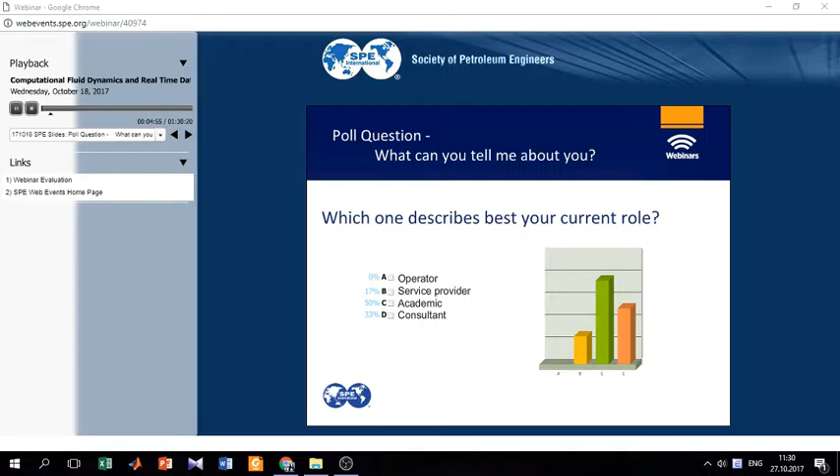Moving on, another question for you. Which one describes best your current role? So again, if you could select from the options available. This takes a bit of time to update with every answer. So we see some academic participants, consultants second, and service providers third. So funny enough, no operators on the line, or operators didn't bother to click on option A. We'll find that out during the call, I hope.

And then last question for you. What type of modeling tools do you use the most? Software from service companies, FEA and or CFD? You develop your own algorithms and models, or none of the above? Okay, so far a good distribution here. I encourage you to answer those questions. This is a way of me knowing that someone is out there as well. I hope this is representative. So a big participation here on software from other companies, and then a split between CFD, FEA, and own models developed. Thank you for that. That gives me a bit of a background to who I am addressing today.

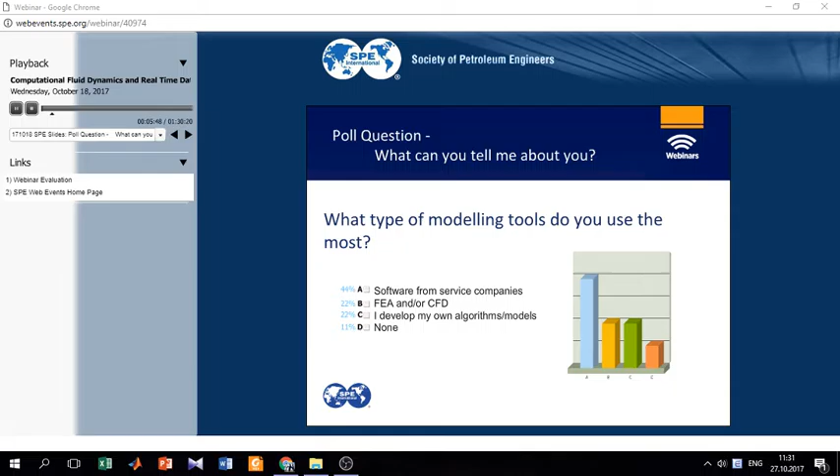So the webinar will be split in three main parts. But before that, I will just cover some introduction on the challenges that we face on a day-to-day basis.

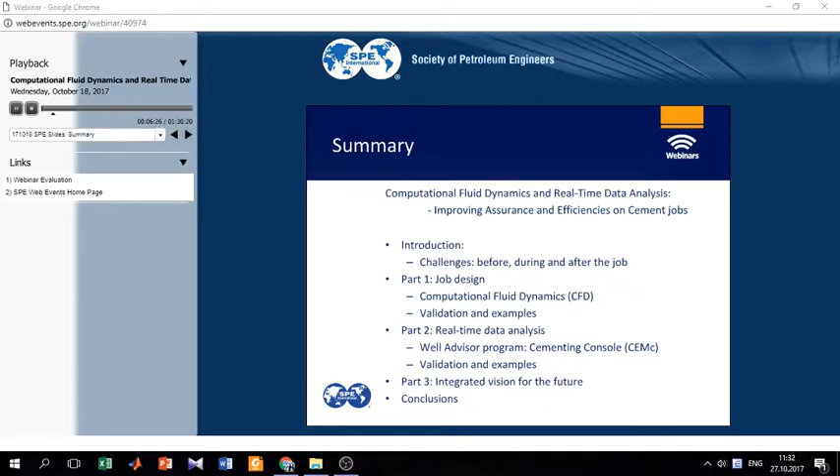And then, as I was saying, there will be 3 parts to this webinar. On the first part, we will be talking mainly on job design and how computational fluid dynamics can help us on that part of the work. On the second part of the call, we will be focusing on real-time data analysis. And then on the third part, I would like to share my vision for the future. I would like to share some ideas and concepts on how these two connect, the real-time data analysis and the preparation for the job.

So let's start the presentation by introducing some of the challenges here. And I would say that the main challenge in drilling nowadays could be perhaps split in 2 big groups. Some of them are physical challenges, some of them are in the domain of the digital and data. So, for example, in the physical aspect of it, drilling is still something that is hardware-based, something that is hands-on, and therefore we rely on challenges such as the pore pressure fracture gradient of the rock to drill ahead. We need equipment that delivers that drilling, and we need equipment as well to produce the wells later on.

In terms of data, we often work in a world that we do not have measurements every time we want some. So if you are drilling, you have to appreciate that the pore pressure fracture gradient often is given by models from the geologist team and subsurface teams as well. And based on that, we design the entire drilling setup and the type of drills, the type of casing used, and then the cement as well to provide reliability throughout the life of the wellbore. And whenever data is missing, we have to rely on simulation tools.

And what I will try to prove today here on the first part of the talk is that some of the simulation tools available in the oil field lack accuracy or even precision. So we might need to think a little bit out of the box in order to get that extra level of detail. If we're talking real-time data analysis, data needs to be available. Data needs to be transferred from the rigs to the office in central locations and perhaps be stored, be interpreted. So we need data management, we need data quality. Then we need tools that can process that data in real time or in almost real time.

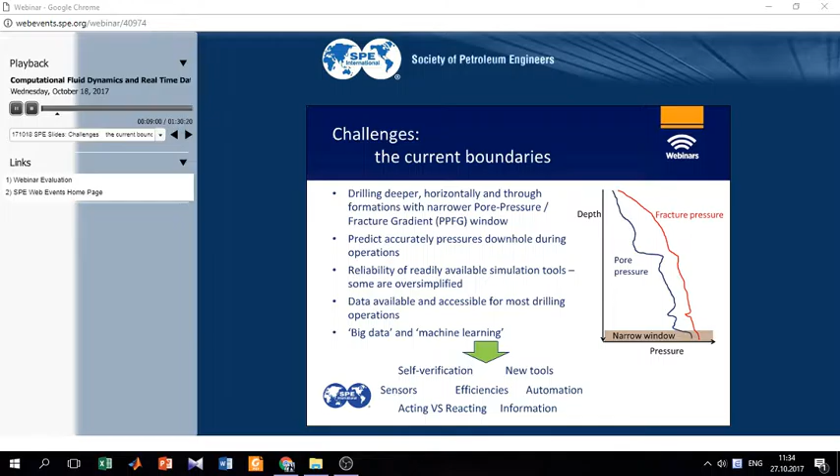So let's dwell a little bit more, as I was saying, in the job design. I will be showing 2 examples here using CFD tools. And in the first, I think it will be clear that some of the tools available do indeed not predict results very accurately, and how can we mitigate that? In the second example, I'll give you a very practical case where CFD helps make some informed decisions. But let's start with this first example.

On the first example, I'll be talking about the flow around liner hangers. This is a work that I did a few years back, and some detail of this work was presented at an SPE conference a few years ago. For those who do not know what the liner hanger is, it's basically a piece of equipment that has the objective of saving the amount of casing that you deploy in the hole. So it's a tubular structure that deploys the casing below it by latching itself to the previous casing, as shown here on the schematics.

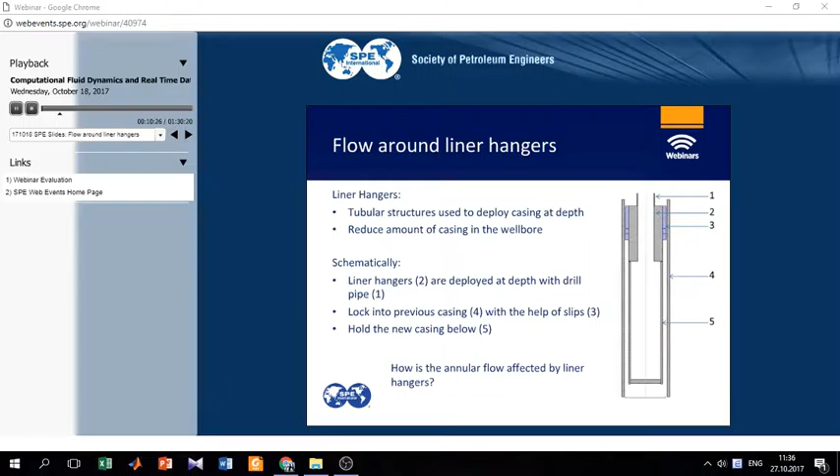But then, because of this latching, this metal-to-metal connection, we are creating restrictions to the flow. And those restrictions will affect the flow and will affect the pressure drop as we displace cement or mud past it. But to what extent? That's the question that we will try to answer. Many of the tools that are available nowadays in the oil field world assume two things. They assume fully developed flow, and they use simplified eccentric tubulars to mimic the complexity of these geometries, the geometric aspects of this liner hanger.

And those assumptions are not verified for flow around this equipment, as with any other equipment that has a geometry that detaches itself from a simple tubular. In this work in particular, I will be focusing on a liner hanger that deploys a 7 5/8 inch liner on a 9 7/8 inch casing, so typical dimensions. And I will be comparing some experimental data, a simplified concentric pipe model, an eccentric pipe model, which is an example of typical tools available in the market for the oil field, and computational fluid dynamics.

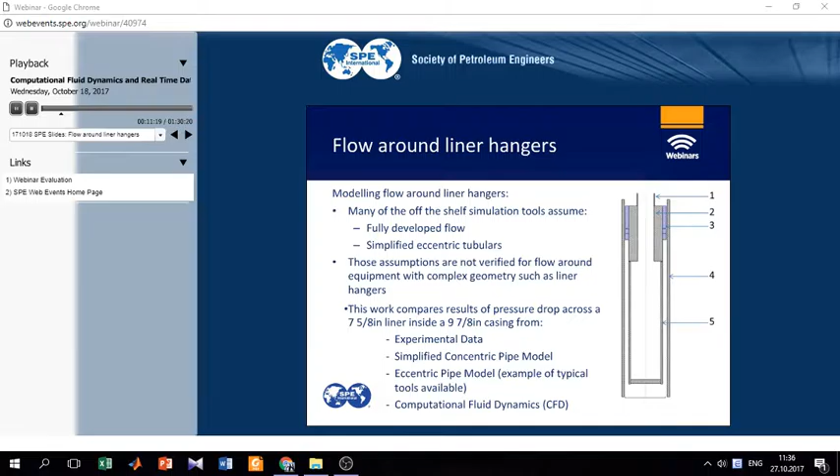Oops, clicking there on the wrong button.

So in terms of experimental test, this was done in a yard facility from a service provider. Service providers were also involved, and basically we have a hole that was 200 feet deep. We deploy the casing with the dimensions that I just said. We deploy the liner hanger, and then we just basically let mud flow around it or past it with those properties there. The mud would follow a typical Herschel-Bulkley model. It was a water-based mud with a constant density of 13.3 ppg.

And we were collecting pressure drop, or let me rephrase that. We were collecting pressure values at the pump at the surface for different values of flow rates. This was the experimental, and as you might appreciate, this will be used as a reference point. So any other result that I'll be discussing here, we would like them to be comparable to this experimental data.

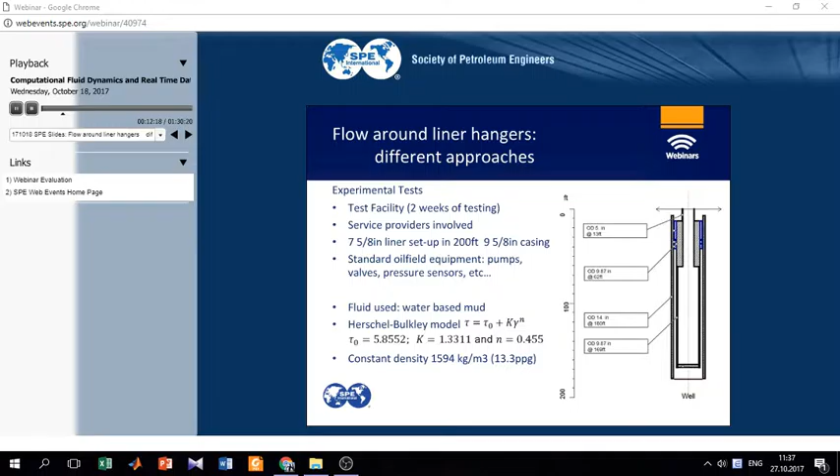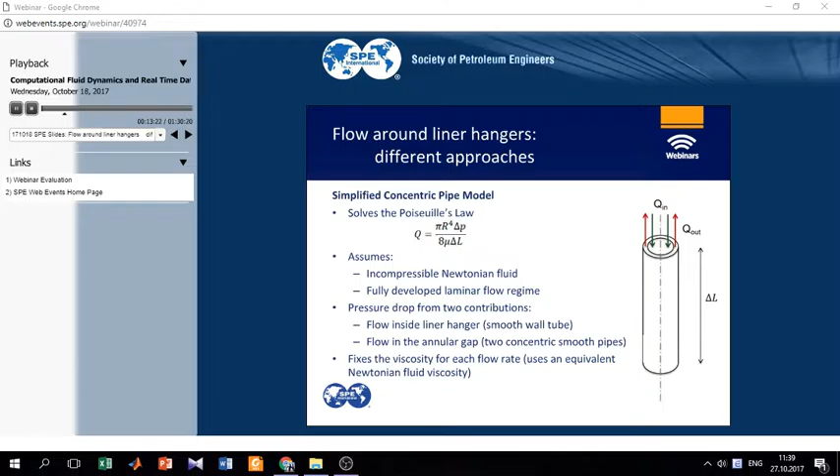This is a very simplified approach, as the name says. It assumes incompressible Newtonian fluid. Again, we are getting away from the non-Newtonian aspect of the water-based mud that we're using in the experiments, and it assumes a fully developed laminar flow. Let's discuss that later on. The pressure drop is mainly from two contributions, the flow inside the liner hanger and the flow in the annular gap. We are fixing the viscosity to an equivalent Newtonian fluid viscosity. Very simplified geometry. Very simplified method of calculating the pressure drop.

The next one that I will be talking about and comparing against is the eccentric pipe model. That is a typical fluid simulator that was developed in the 90s. Many service providers, many operators rely on tools that were developed many years ago. Of course, there have been updates, but these still have some assumptions. Simplified eccentric tubulars. For example, in the case of the liner hanger, instead of recreating the geometry in detail, we often play around with the diameter to create that restriction to the flow.

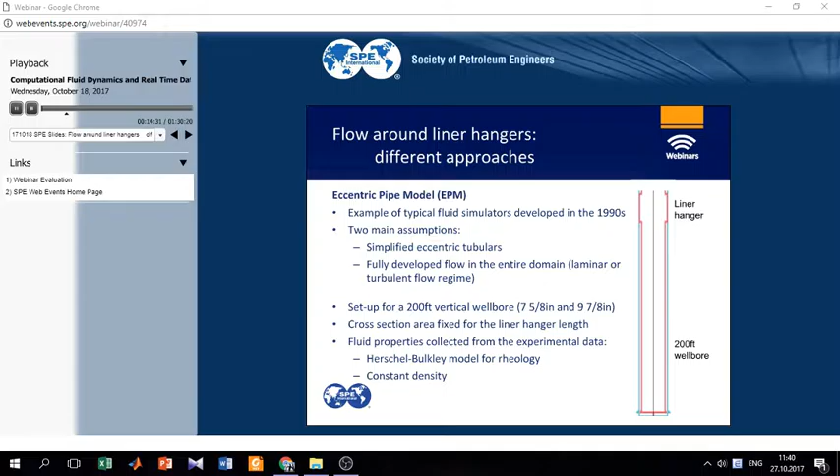And again, this simulation tool still assumes fully developed flow in the entire domain, but it might allow us to use either laminar or turbulent flow regimes. If it's something in between, in a transient state, we won't be able to use this tool very accurately. The model that we use here was for a 200 feet vertical wellbore, same dimensions as the experimental, and we can accommodate a Herschel-Bulkley model for rheology of the water-based mud and constant density as well.

Even though the simulation was only for 7.5 meters, it still created in excess of 2.5 million cells of about 1 to 3 millimeters each. Given the repeatability and symmetry of this geometry, only 1/6 of the structure was simulated. But because we're studying the pressure drop across it, it's still representative. The boundary conditions were a mass flow at the inlet and a fixed outlet. I'm using a laminar formulation, so I'm not using any averaging method to calculate turbulence if indeed turbulence exists. Density is constant, and the rheology is also a Herschel-Bulkley model.

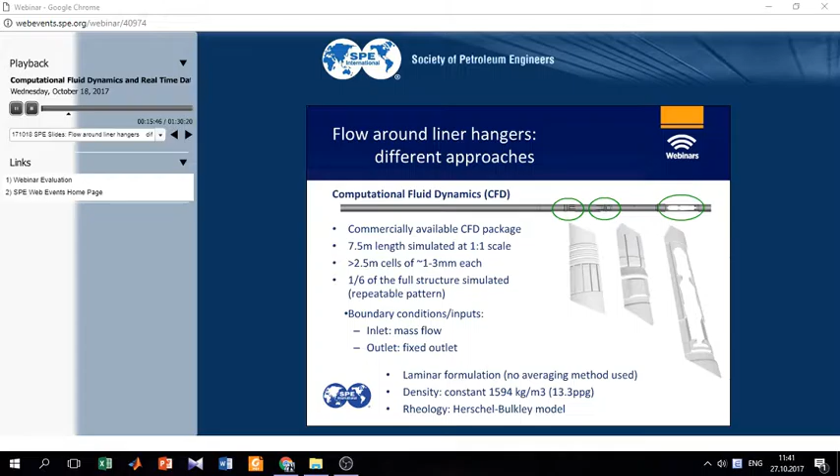If I remind here what those assumptions were, we were using Newtonian fluid and a fully developed laminar flow. So one, or both, of these assumptions may not be doing the trick for us.

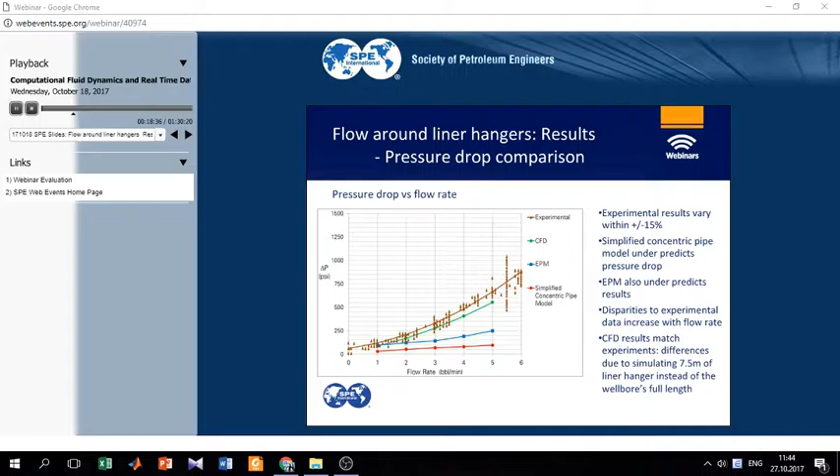But it's worth considering that most of the geometry is smooth pipe. Only around the liner hanger structure will we have these geometries that create obstacles to the flow. So I think with this result we prove quantitatively that CFD can be representative of the flow of the liner hanger. With that in mind, perhaps now we can compare a little bit more in detail pictures from experimental tests to the CFD results.

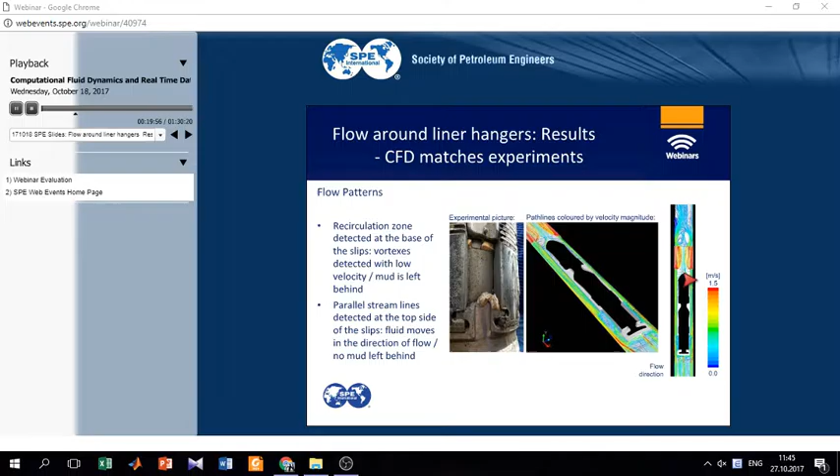And then you see, parallel to the slip zone, pretty well-defined parallel streamlines, which means that the fluid is moving all the way up across this section here. And that creates this clear area, but also some level of high velocities that might induce erosion. On another picture, you see here that on the geometry there's a bigger diameter on the liner hanger, and that creates an obstacle to the flow.

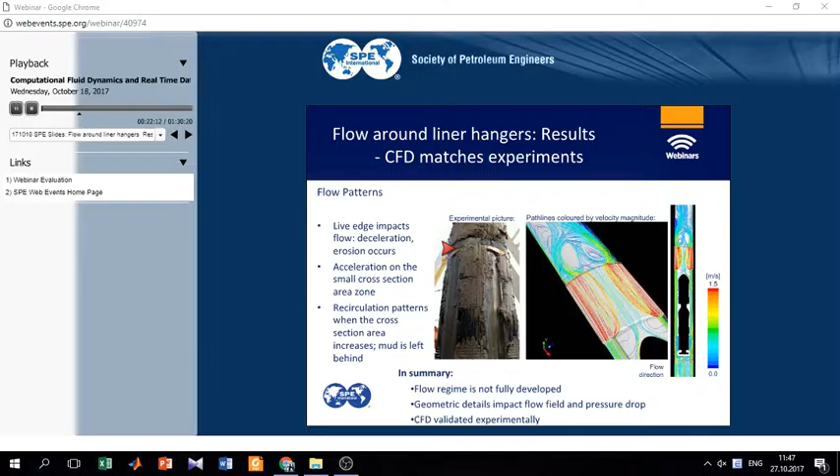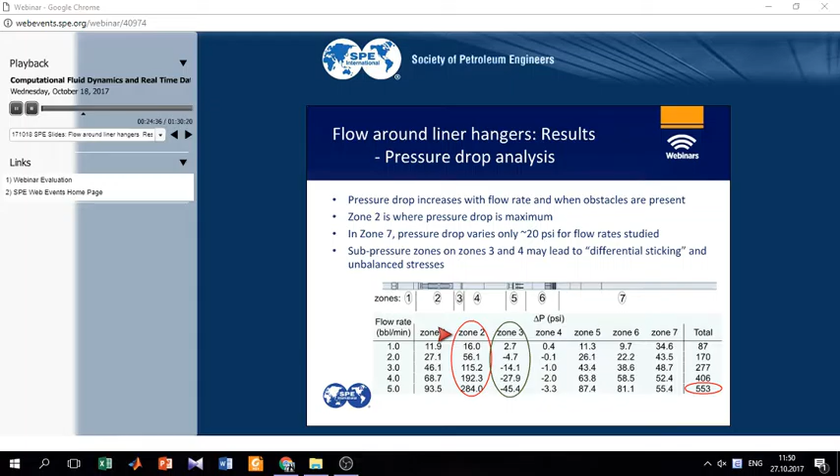But let me ask you this. If you had to improve the geometry, what zone would you probably work on? And to me, the question is clear. Looking to the data here, perhaps zone 2 is worth considering. Perhaps zone 2 is the zone that most affects the pressure drop when we are flowing mud across the liner hanger.